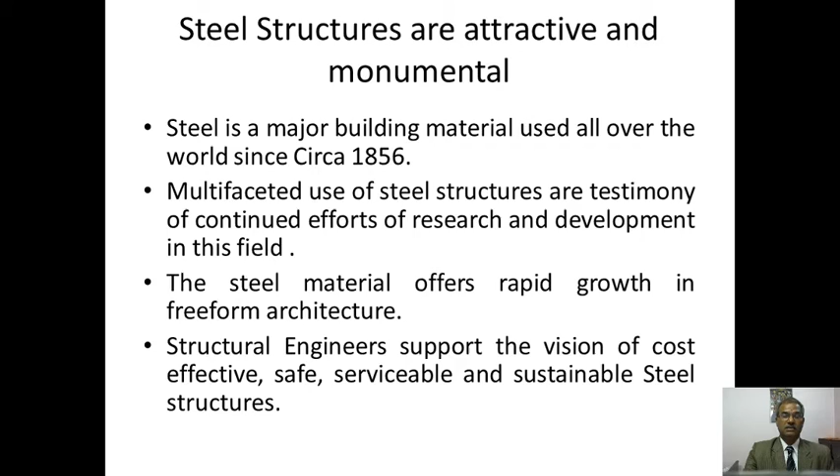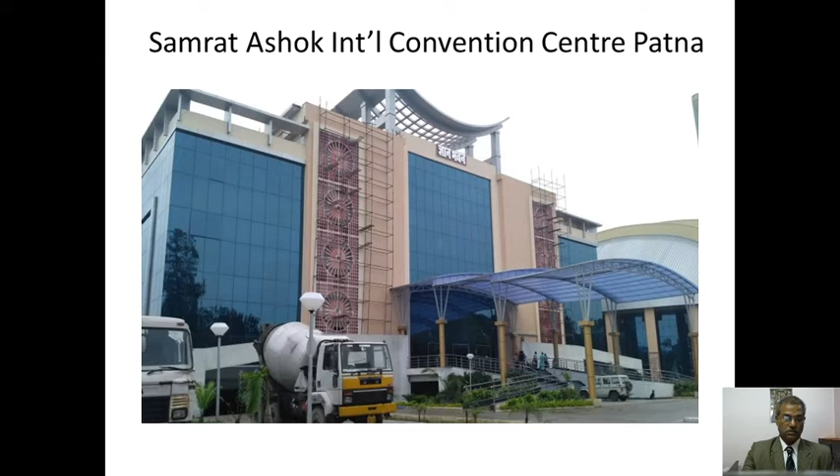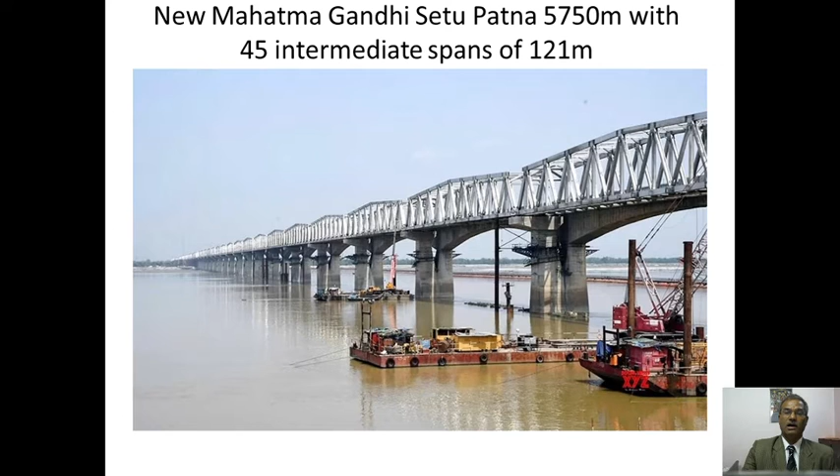Some landmark examples of Indian steel structures are the Howrah Bridge, the Samrat Ashok International Convention Center at Patna, which contains a Gyan Bhavan of 800 capacity and a Bapu Sabhagar of 5000 capacity. The Mahatma Gandhi Setu Patna, which is 5.75 km long, is another landmark steel structure. The Digha Railroad Bridge in Patna, which is 4.5 km, is a marvelous example of a railroad bridge.

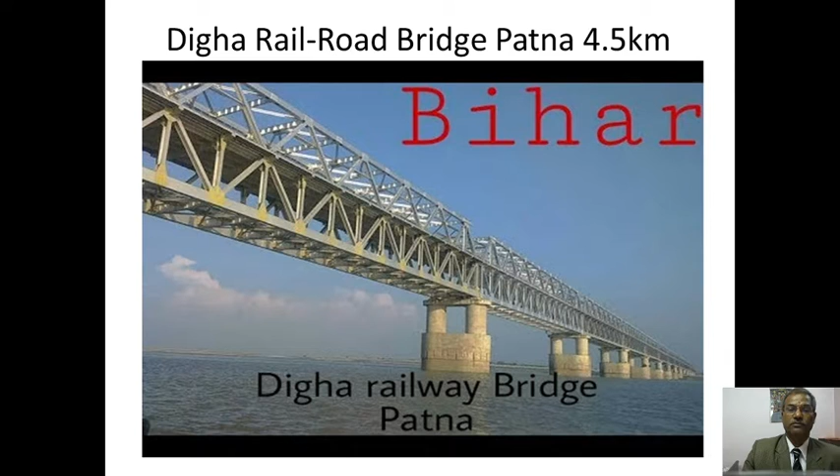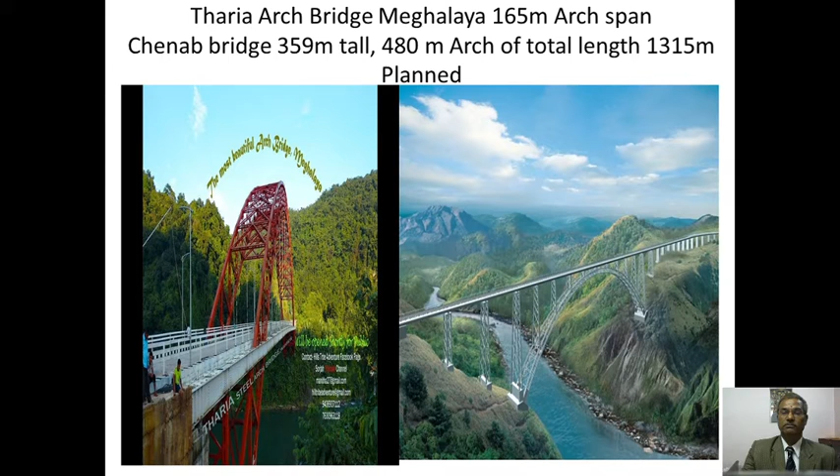The Tharia Bridge in Meghalaya and the Chenab Bridge in Jammu and Kashmir, which is 359 meter tall and has a 480 meter arch of total length 1315 meter, has been planned. When it comes to reality, it will become the tallest arch bridge of the world.

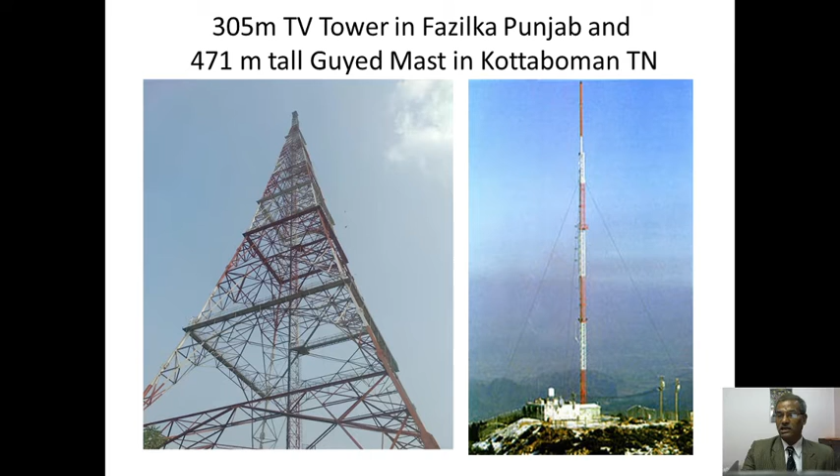The 305 meter TV tower in Fazilka and 471 meter tall guyed mast in Kottaboman in Tamil Nadu are other examples. O.P. Jindal Knowledge Tower in Hisar, which is 282 meter, and Wills Tower Chicago, which is 482 meter, are marvelous examples of high-rise steel structures.

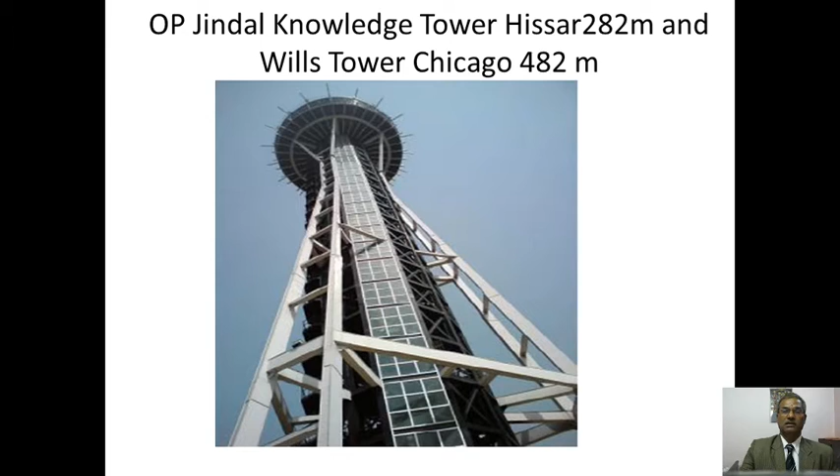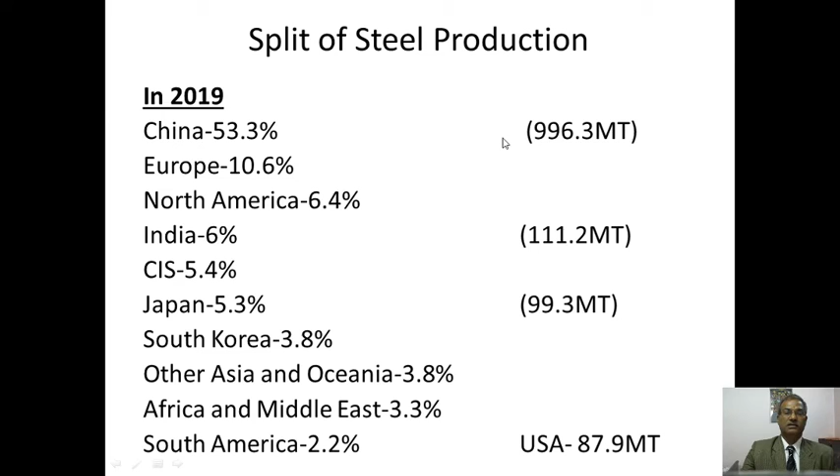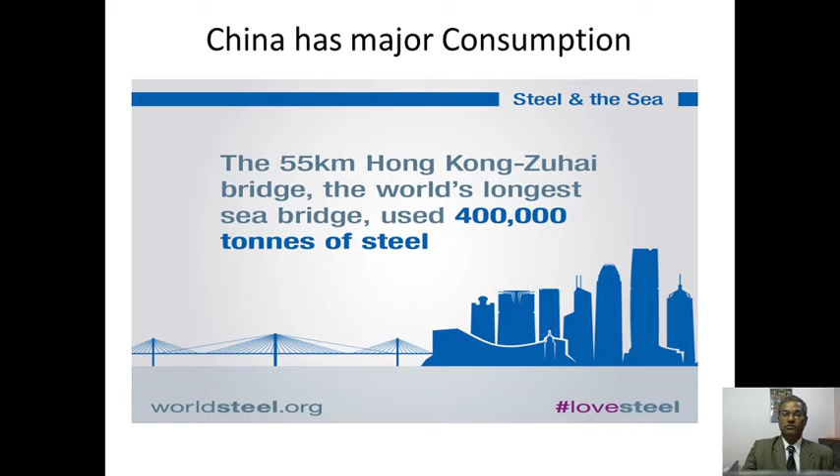China has been a major consumer of steel also. This is evidenced by the 55 km Hong Kong-Zhuhai Bridge, which is the world's longest sea bridge, and used 4 lakh metric tons of steel. Steel structures include low-rise and high-rise buildings, bridges, towers, pylons, stadia, exhibition halls, factory units, floors, roofs, oil rigs, ships, shipping containers, submarines, rail tracks, hyperloops for high-speed trains.

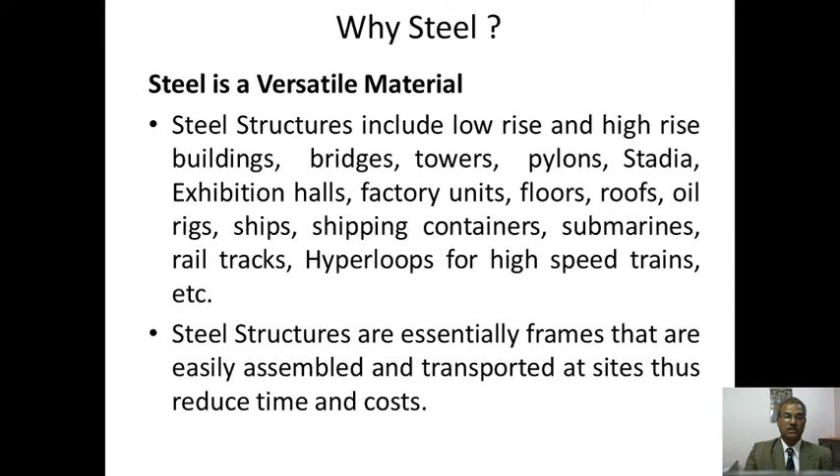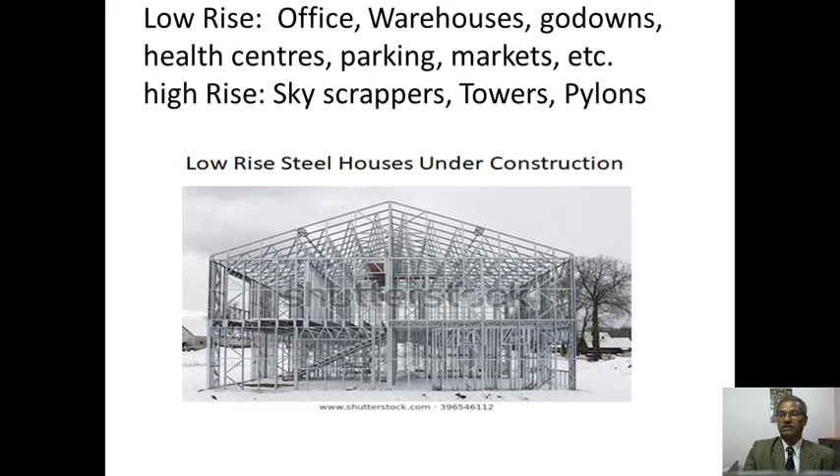Steel structures are essentially frames that are easily assembled and transported at sites, thus reducing time and cost. Low-rise buildings, offices, warehouses, godowns, health centers, parking, markets, etc. are the examples for low-rise buildings. High-rise examples contain the skyscrapers, towers, pylons, which are all possible by the use of structural steel.

The advantages of steel are high strength, ductility, high stiffness, ease of fabrication and competitive cost. Steel is preferred in the situation where loads and spans are large. Steel is preferred in high seismic zones due to its high energy dissipation characteristics. Steel lasts for generations, so you can build your houses for grandchildren.

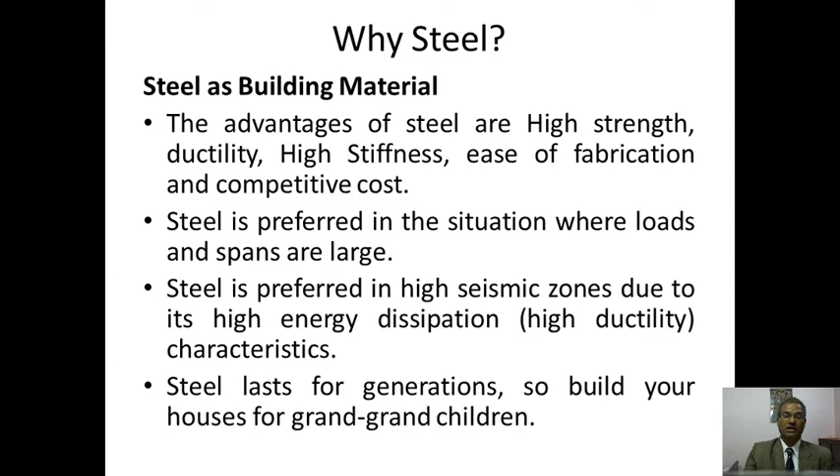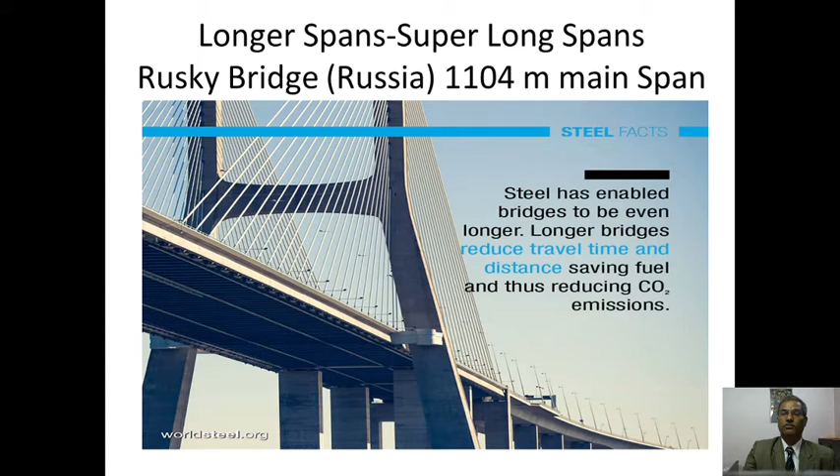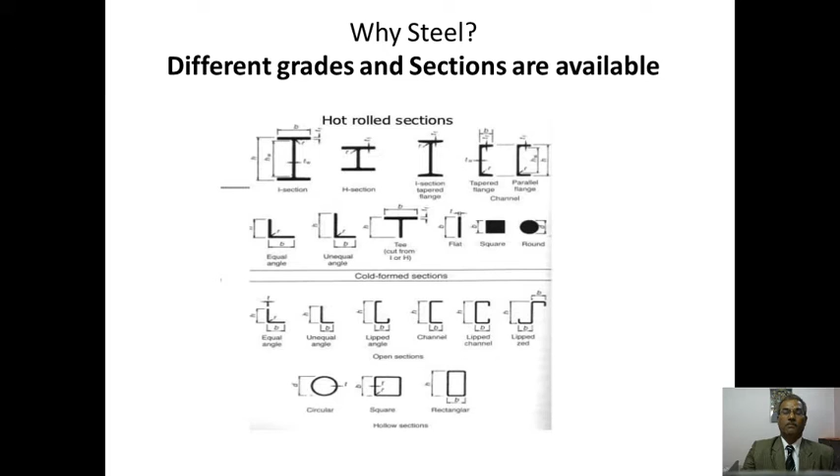With the advent of high strength steel, longer and super long spans of cable stayed and cable suspension bridges have become a reality. One such example is the Russky Bridge in Russia, which with a 1104 meter main span is a marvelous cable stayed bridge. Different grades and sections of steel, whether hot rolled or cold-formed sections, have made structural steel capable of making any type of steel structures.

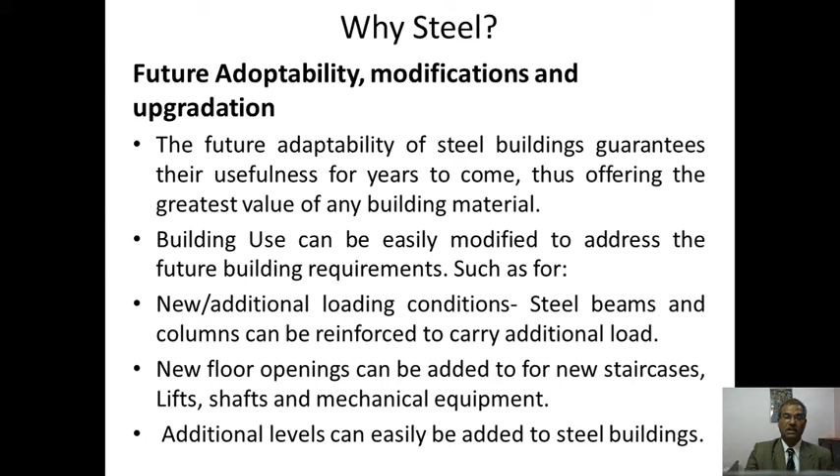Future adaptability, modifications and upgradation of steel buildings guarantee their usefulness for years to come, thus offering the greatest value of any building material. Building use can be easily modified to address future building requirements, such as for addition or new loading conditions. Steel beams and columns can be reinforced to carry additional loads. New floor openings can be added for new staircases, lifts, shafts, and for mechanical equipment. Additional levels can also be easily created.

Let's have a breakdown on the cost of a steel project. It's seen that fabrication cost is 46%, which is the major share in the cost. So it is evident that the cost can be brought down by employing experienced and expert fabricators.

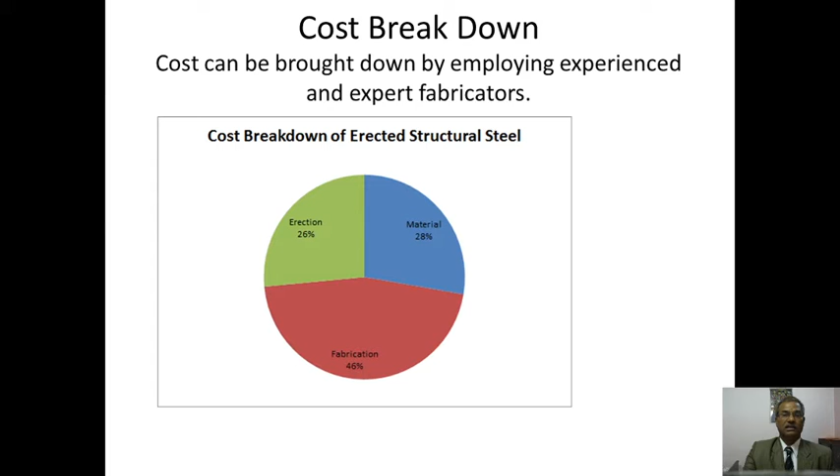Lower life cycle costs, recyclability, sustainability are the major factors which add to the growth of structural steel. Steel structures provide long-term durability with lower life cycle costs. Steel can be recycled over and over again and remade into new members without any loss of quality.

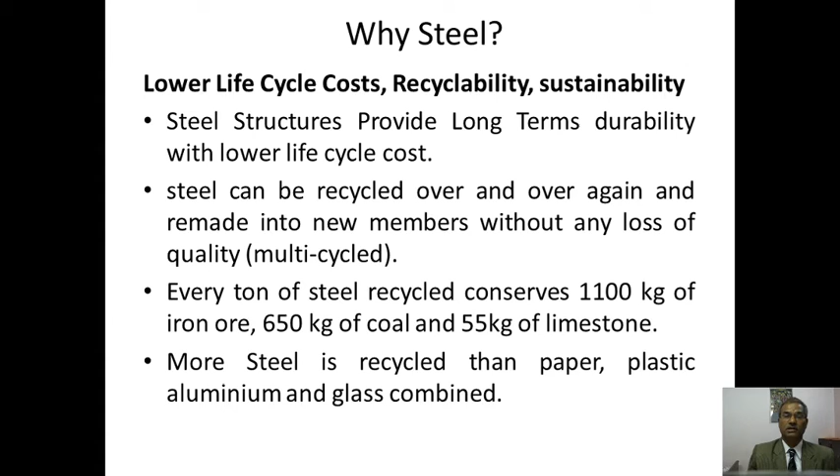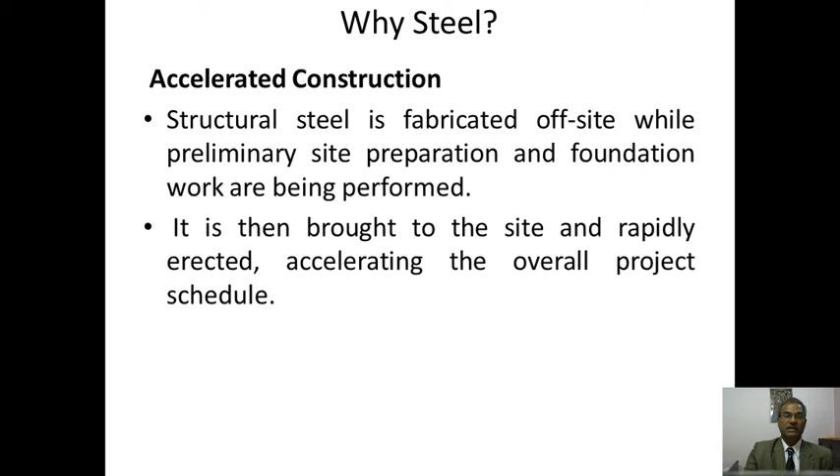Accelerated construction is another advantage attached with the structural steel. Structural steel is fabricated off-site while preliminary site preparations and foundation works are being performed. It is then brought to the site and rapidly erected, accelerating the overall project schedule.

Deconstruction is another aspect of steel construction. Beams, columns and other structural steel elements removed from a building can be refabricated for use in new structures. Modular construction is another aspect which can boost the construction in steel.

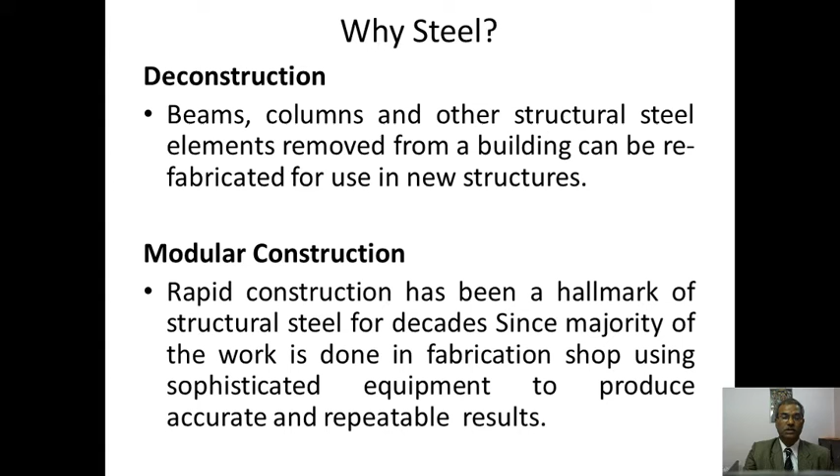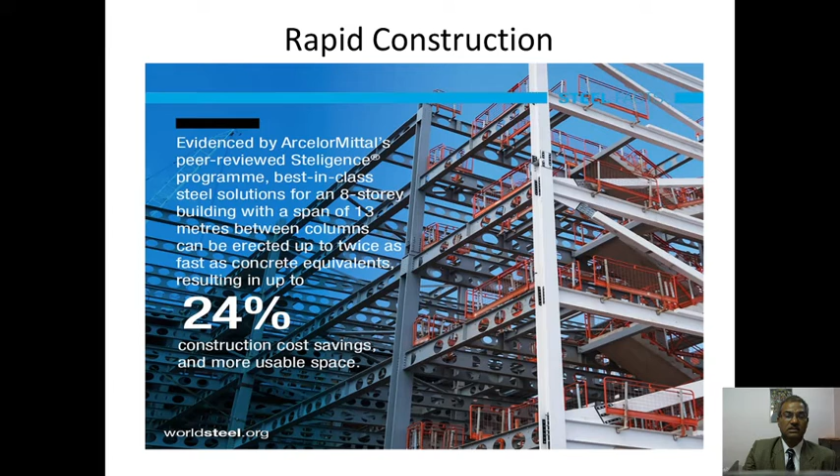Rapid construction has been a hallmark of structural steel for decades, since the majority of the work is done in the fabrication shop using sophisticated equipment to produce accurate and repeatable results. This one example is showing that an 8-story building with spans of 13 meters between columns can be erected twice as fast as concrete equivalents, resulting in up to 24% construction cost savings and more usable space.

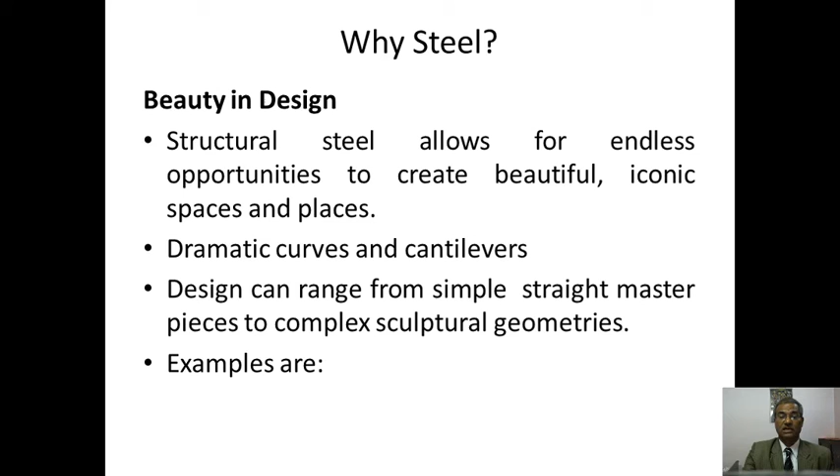Beauty in design is another marvelous aspect of steel buildings. Structural steel allows for endless opportunities to create beautiful, iconic spaces and places. Dramatic curves and cantilevers add to the beauty of the structures. Design can range from simple straight masterpieces to complex sculptural geometries. Examples are the Agora Garden Tower in Taiwan and the Denver Union Station.

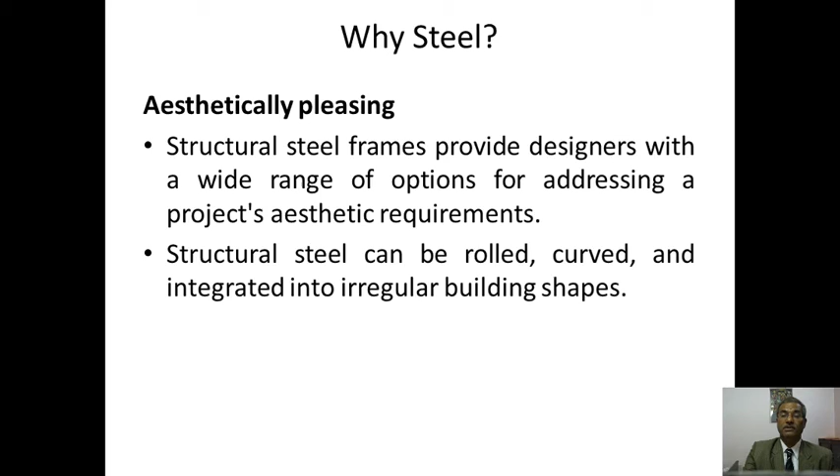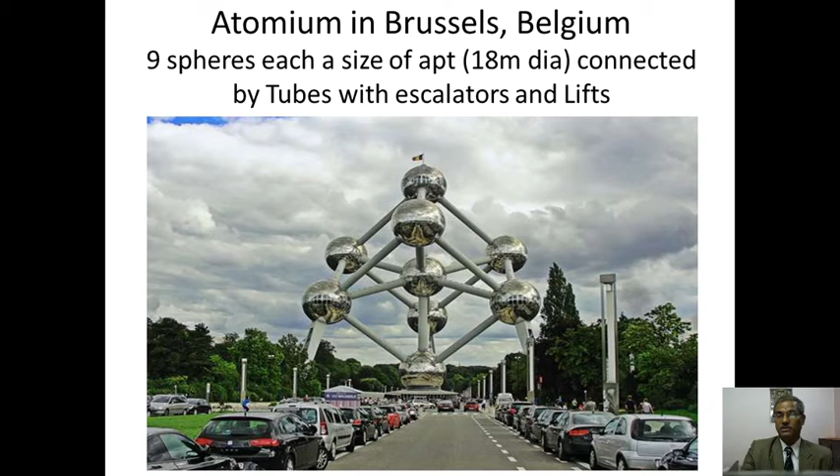Aesthetically pleasing structures can be had from structural steel frames. Structural steel frames provide designers with a wide range of options for addressing a project's aesthetic requirements. Structural steel can be rolled, curved, and integrated into irregular building shapes. The Atomium in Brussels is another example. 9 spheres, each of 18-meter diameter, are in the shape of apartments. These spheres are connected by tubes with escalators and lifts.

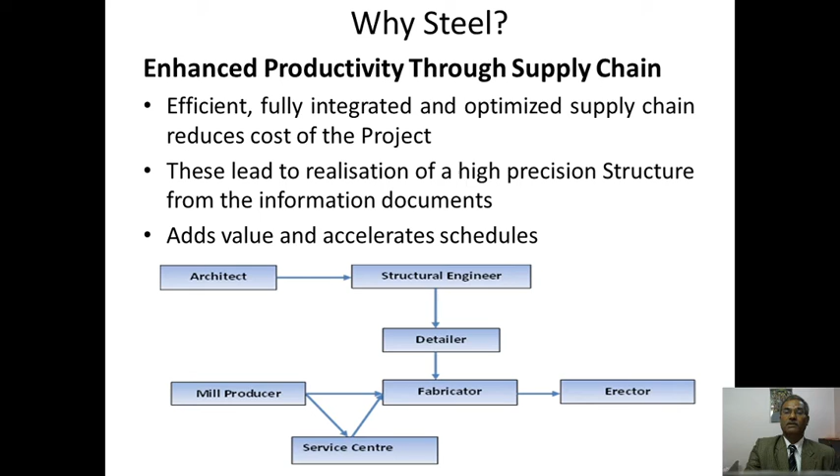Enhanced productivity through an optimized supply chain reduces the cost of the project. These lead to the realization of a high precision structure from the information documents. So it is evident that enhanced productivity can be had through management of the supply chain.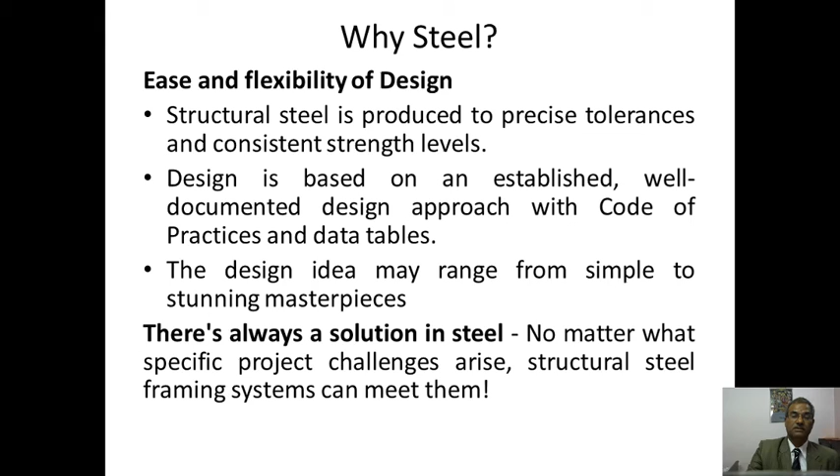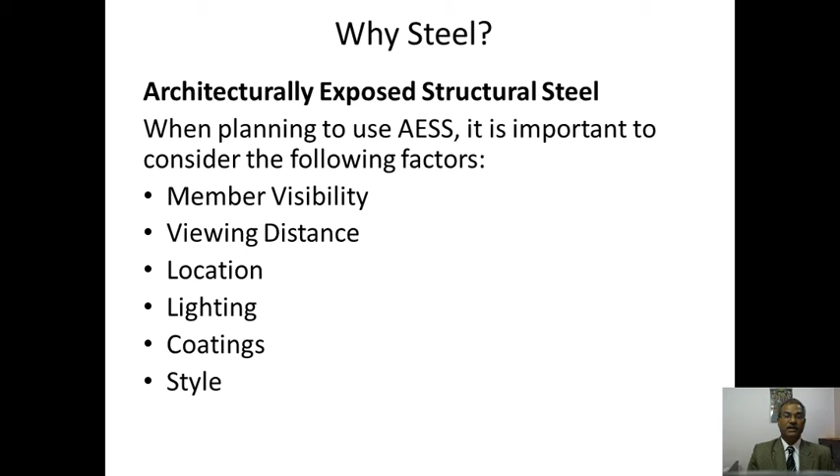Architecturally exposed structural steel is another advantage which can be a boosting factor for the construction and aesthetic appearance of steel buildings. When planning to use architecturally exposed structural steel, importance should be given to member visibility, viewing distance, location, lighting, coatings and style. An example is the Florida Polytechnic University.

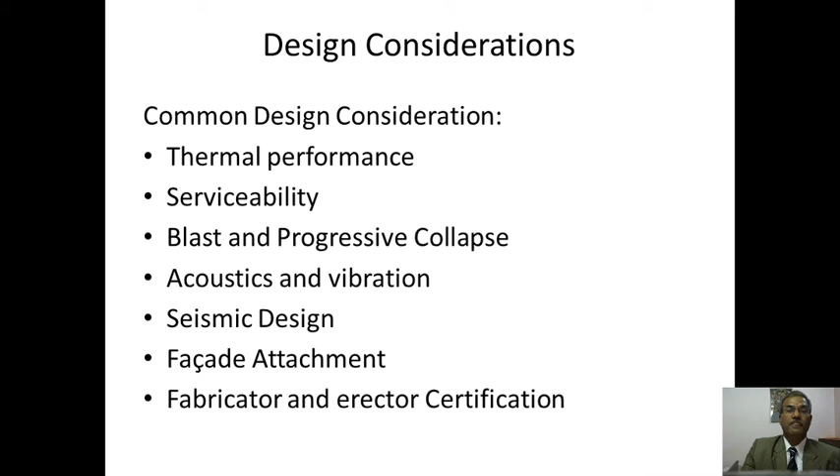Some design considerations that must be given due attention are thermal performance, serviceability, blast and progressive collapse, acoustics and vibration, seismic design, facade attachment, and fabricator and erector certification. All these considerations will lead to a successful steel project.

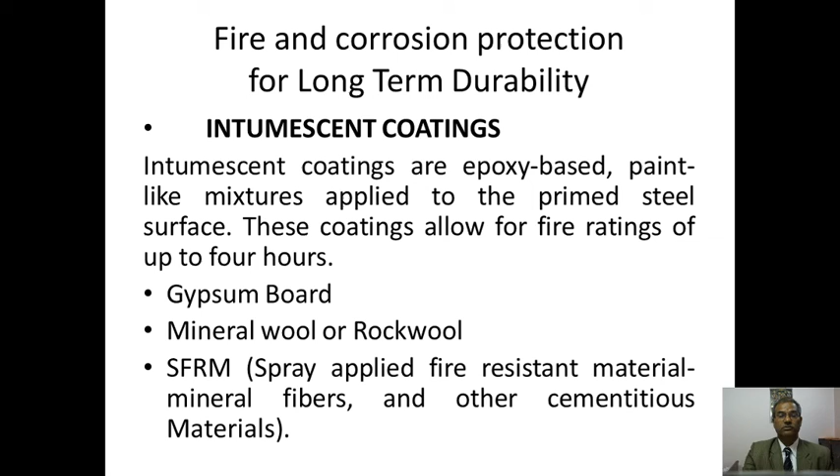Fire and corrosion protection for long-term durability must be addressed. Intumescent coatings, gypsum boards, several SFRM spray-applied fire-resistive materials, mineral wools and rock wools are used to enhance the fire ratings of the buildings.

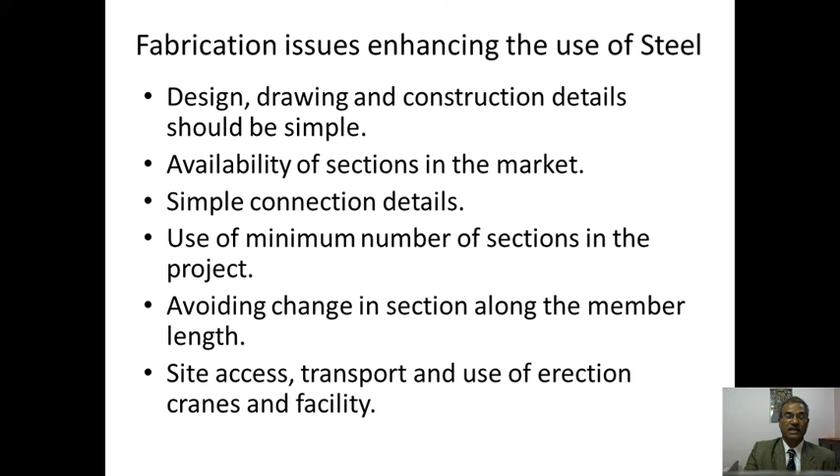Some fabrication issues enhancing the use of steel: design, drawing and construction details should be simple, availability of sections in the market should be ensured, simple connection details should be given, a minimum number of sections should be used in the project, avoiding change in section along the member length should be practiced, and site access, transport and use of erection cranes and facilities should be ensured.